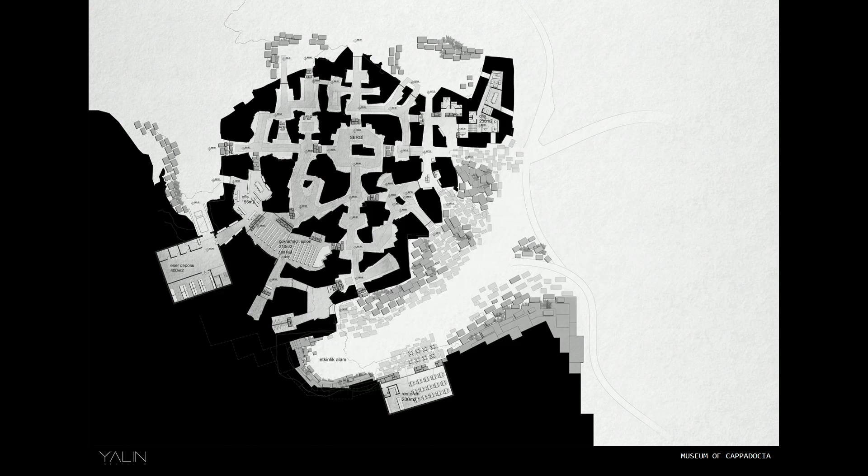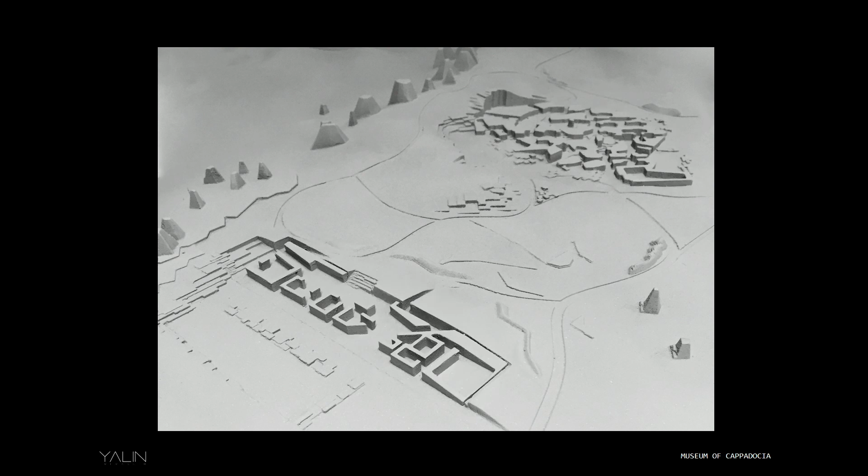Okay, the idea we are following is this: we are converting this part as a new stone mine. We are taking, covering, collecting, and then building this entrance center with those stones. This entrance allows us to protect the original rock, because normally you don't want buses or cars going near a stone like that. It functions like this: you come with a car or bus, you go inside, this is an open structure, you go up with a ramp, and then you enter the museum.

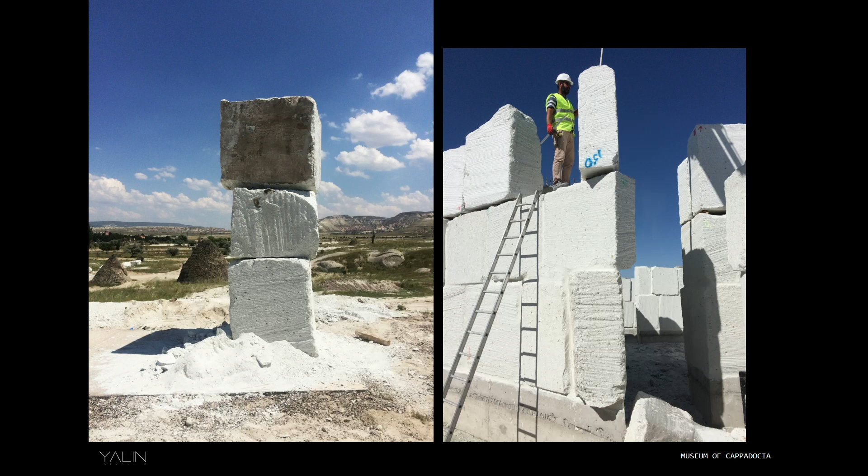You walk, and this is the museum, and all the landscape also belongs to it. Of course, it's very difficult to build in this way, because it's an ancient technique, and no one knows how to put those stones together.

Because for one stone, the idea is 3 stones and 5 meters, since we want to have some structural, huge rooms. There were many, many tries. This was one of the first tries, 3 stones put together. It took 1 day, because we didn't have this information. And this is nearly by the end.

We decided on site some textures, corner details, etc. Some of them are impossible to draw on paper. This was the important point. That's why we had so many site visits.

So this is one of the best tries. You see here the structure and the scale. We have a concrete base protecting from the rain and snow, because it's a very snowy region. And this is the texture. I like it. This is concrete.

Normally, we expose the concrete facade, and we try to have a kind of similarity. They wanted to clean all the facades, the stone facade. We said stop it, because in the project it was something like that. We keep it as it is.

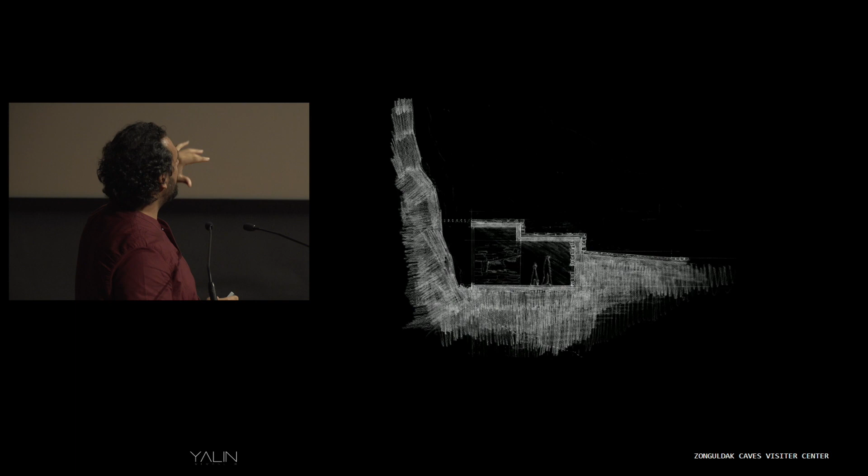The problem is making a visitor center, collecting people, and orienting them to the entrance of the cave. This was the idea: coming with bus or car, parking, and going inside. The idea is very simple - collecting the visitors and facing them with this beautiful rocky line, making a continuous circulation, a human-made cave, and orienting the visitors to the entrance of the cave, then orienting them again outside.

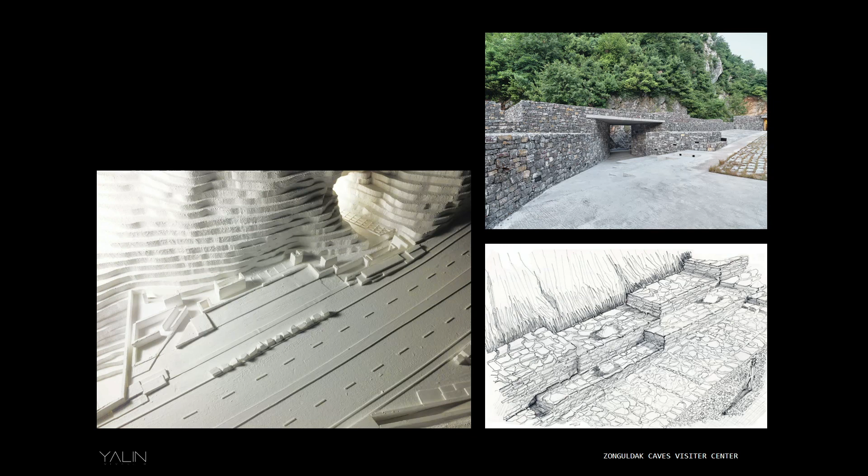This was the idea. These were some model photographs - this is the inside, and this is the landscape on this visitor center. This stonework is very interesting because we took the stone from the other side of the hill.

So you can see in the next image, maybe, a very near similarity with the texture of this existing rocky character. So this is the landscape. Here you see the entrance of the cave, and this is the entrance of the visitor center. You are parking - it's kind of a semi-hidden landscape, we can call it so.

Again, with concrete, with bus stop, the entrance and the landscape character. This was the idea from the first sketch. There are two caves - one is very short, not going so long, but the main entrance is here. We use all that stonework from the excavation also. It's just a protection shelter. You go inside and then the building orients you to the entrance of the cave.

This was the main goal for us, facing this beautiful texture of rock. It was very hard to do this because it's so narrow to a rock building. Also we use some furniture elements as the rocks.

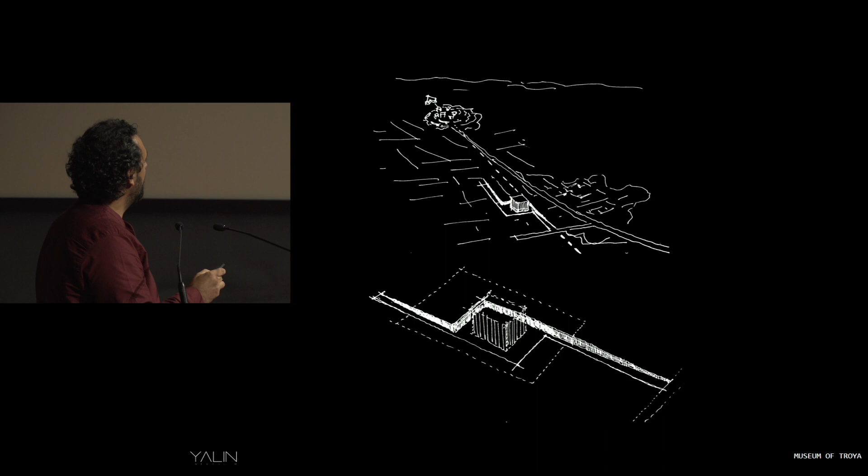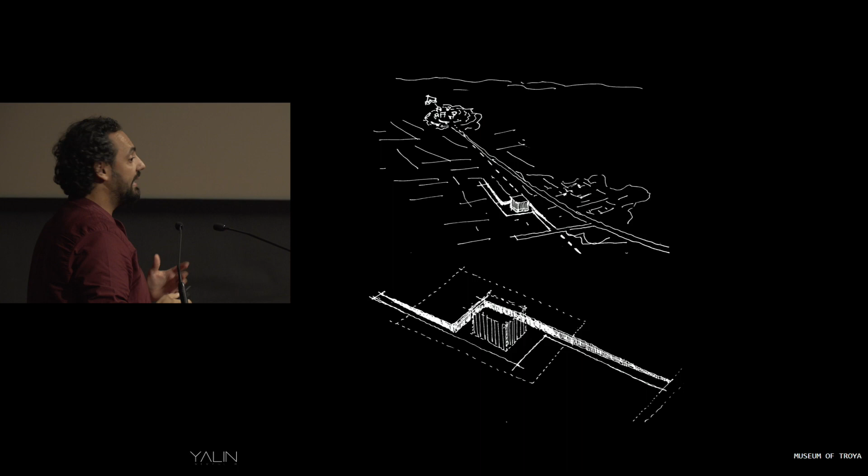This was a competition project, a national one. 140 projects participated, and our idea was very simple: going down with a ramp, reaching the street level, and going up again with a ramp. All this exhibition stuff is collected in this rusty block, like an artifact, like a terracotta artifact maybe.

This is the building. You come, park here, collecting the visitors. You go down with a ramp. This is the street level, and the landscape goes - this is our side. Also, outside in the garden, we have something.

This is the site, Troy. It's 1 kilometer away. You park here, you visit the museum, and you walk, or your bus takes you, and you go to the site. This is very important - Turkey has many different ancient cities, but Troy is one of the popular ones.

The Ephesus and the Troy have more than 1 million visitors. But it's not easy to understand the ancient city of Troy. If you go as a visitor, you should have a really good guide. That's why the museum has this mission.

You come to the museum, you visit it, and you have some questions, but not everything. You also have some very hard questions when you go outside. This is also important for the curation - it's a long-standing object in the landscape.

The entrance ramp situation - very simple materials, some concrete, some stones. Also inside we have just concrete and wood material. And it's very important, the circulation, how you move in this museum.

You go down with the ramp - it's a stretched entrance situation - and you go up always with the ramp. It's just a 6-percent slope, very easy to go. This ramp takes you to the exhibition halls, also to the roof. And you have finally an overview, very wonderful, very good, very nice, very open overview to the Homeric landscape site, Troy.

And this is the construction. I like constructions - I don't see the construction phase as an ended phase. It's a part of the design, and it should be reflected also to the building.

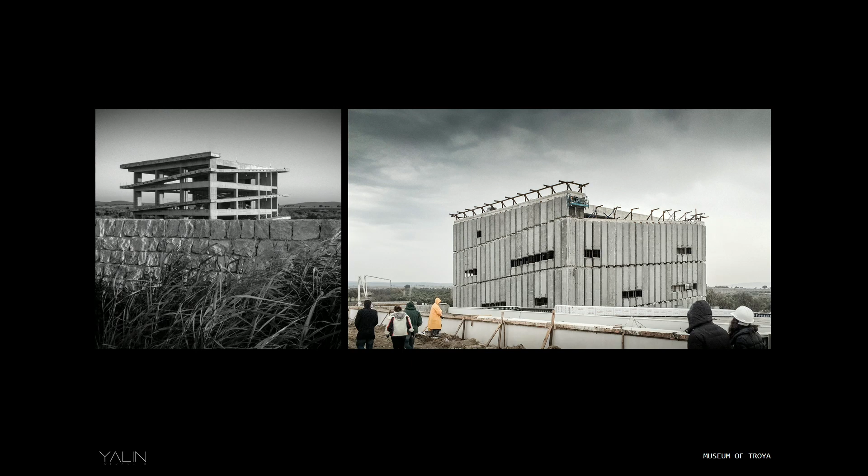These panels are isolated concrete panels, and they are spiral, following the ramp construction, and also the windows are insulated. Just the panel comes, and the glass panel comes, and it's finished. This was the idea. This is inside.

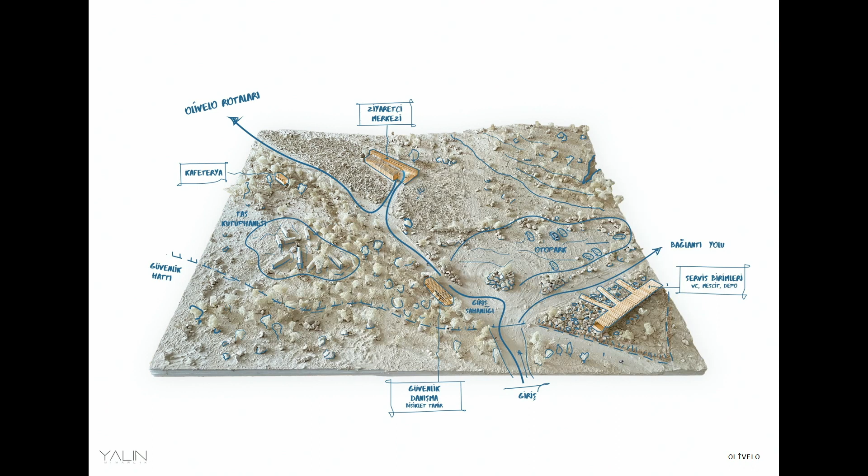This is the design, just for the entrance hall, and we use just wood elements for it. You go inside from here, you need some WCs, security, parking area, a visitor center, and cafeteria. That's all. We also have a stone library, because the region Izmir has a very rich library of stone, maybe 42 different kinds of stone, masonry types.

They have some steel pieces, they have many woods, pine, 10 to 20. We try to understand their ability - what can they do in their atelier, what can they construct. This was the idea, and then we worked in this way.

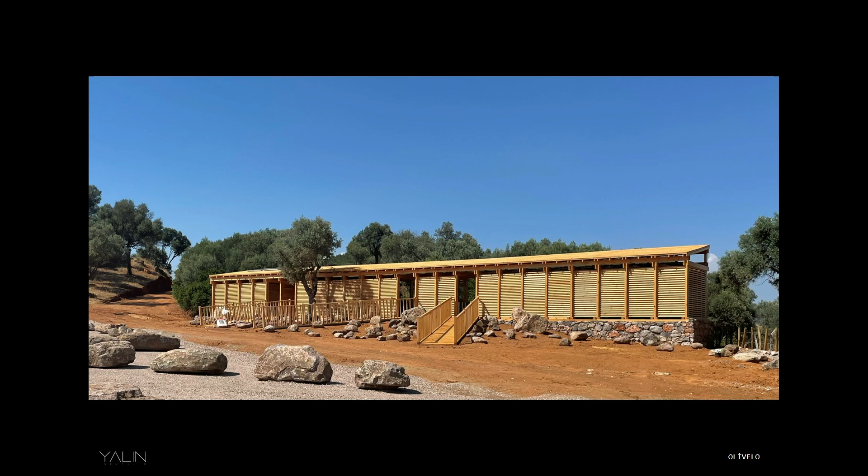This is the WC - each panel is a WC cabin. You go inside, and this is the technical part. It's a very simple structure, no isolation. This is inside the WC - it's oriented to the green. This is very important.

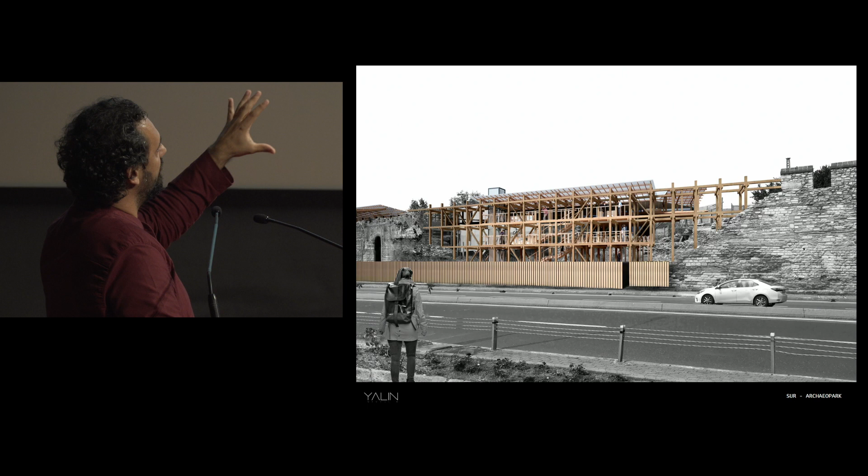Yeah, something like that. From this beautiful wooden field structure to an infill project - this is the historical wall of Istanbul.

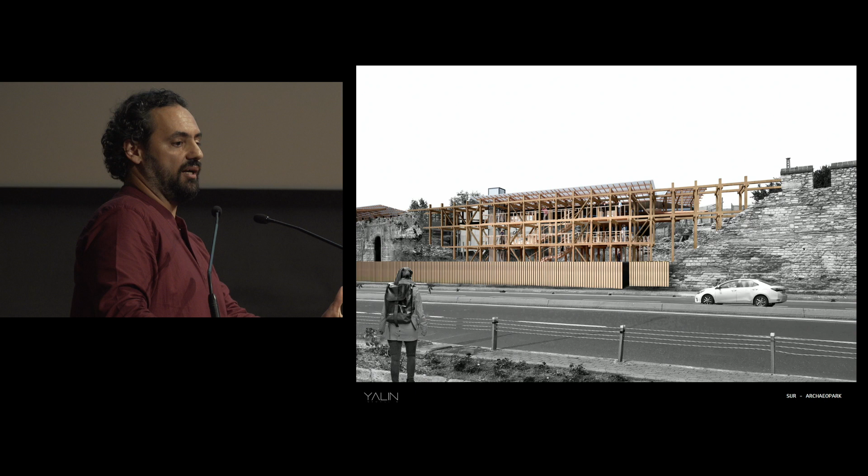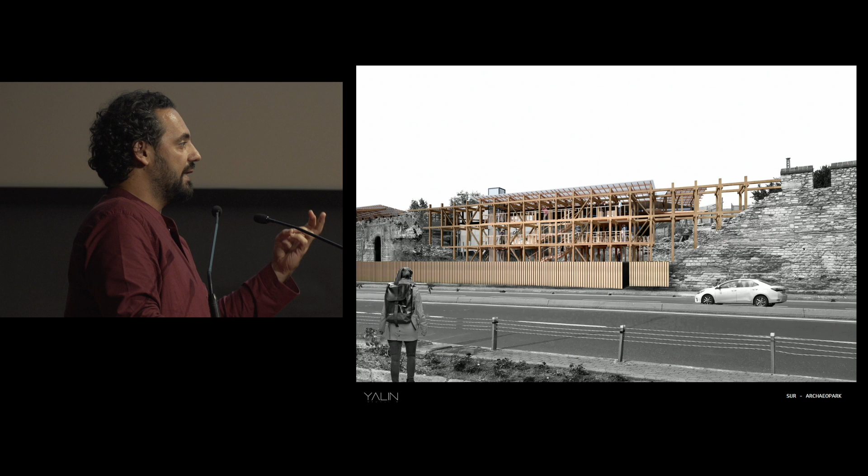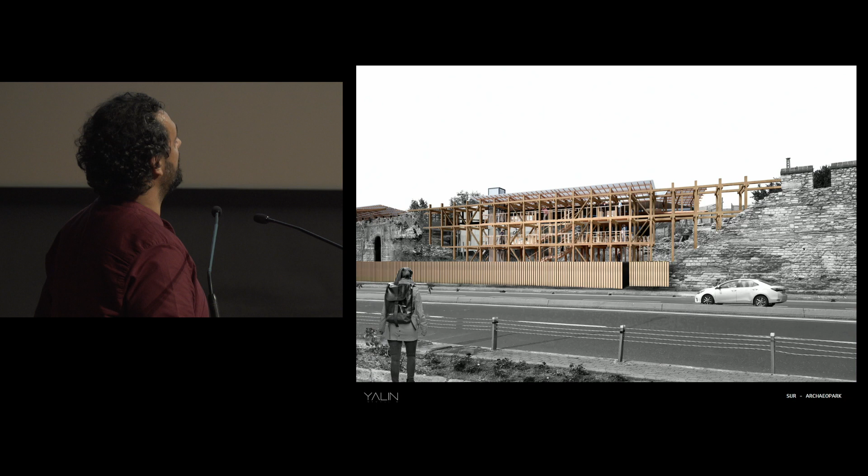And the idea is the following, a very creative one: the excavations and the restorations going on at the same time - is it possible to do this? Ongoing excavation and restoration is very exciting. You can go inside as a visitor, you can have a journey inside an excavation. This was the idea, and I think we had the opportunity to build this.

This is just a part of the project. It's 2.5 kilometers long. This is the site.

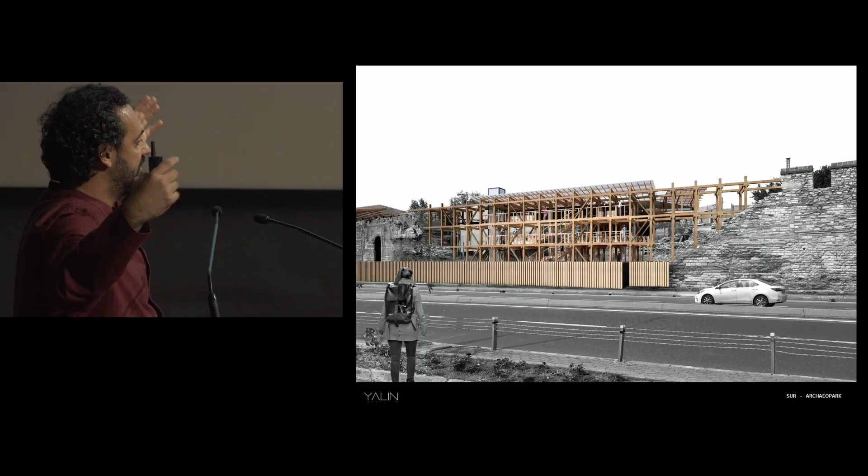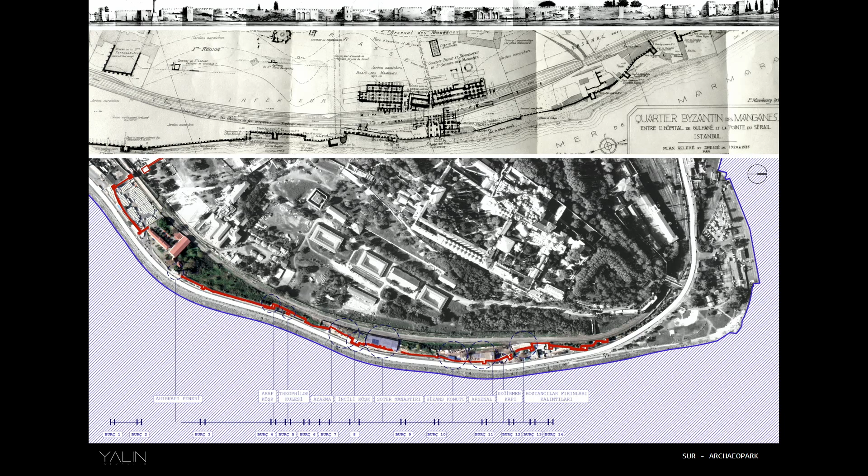The distance is very small. You don't have this maneuver, so you have to use these gaps to place your facilities. This was the existing situation. The constructor, the restoration group, used this kind of structure.

I think it's fascinating what they are doing. It's not designed. Normally architects come and design some real huge glass structure, but I like this so much. This structure is living, it's not fixed. You come one week and the other week it's not there because they move it. It's flexible, it's a living structure.

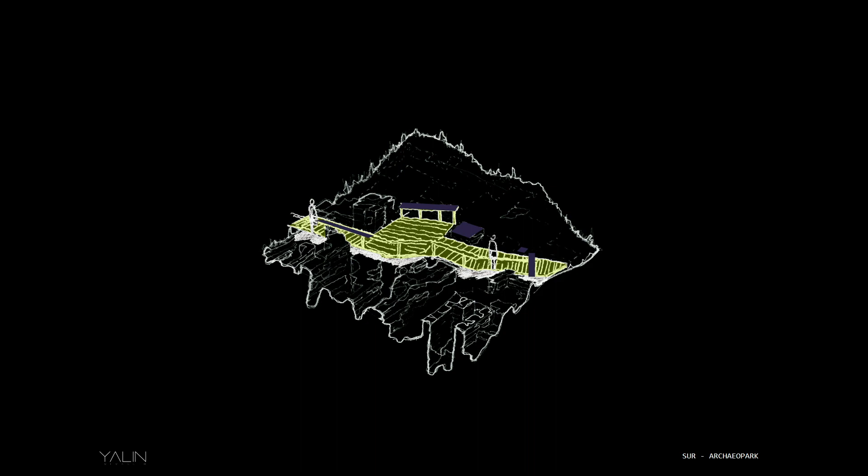They use the same material. They cut it, they hang it, they can do everything with it. And it's a really good design beginning point, I think. And this was the idea: reacting, passing to the excavation, using different ways, moving, removing, building a roof, something like that.

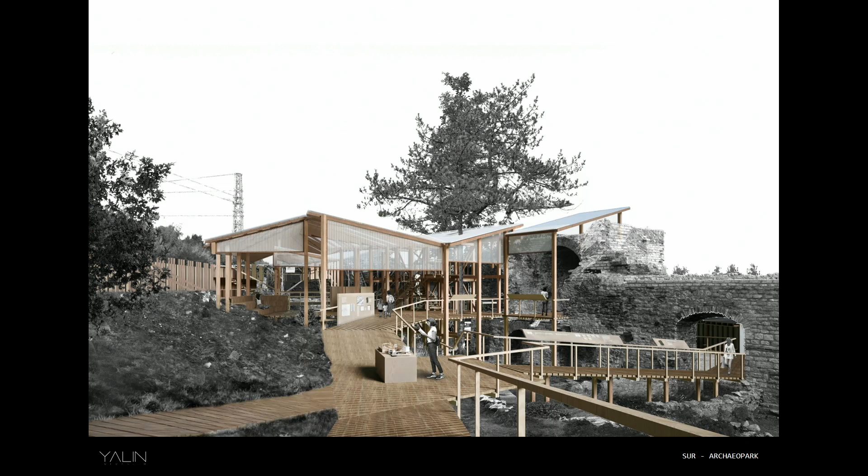So this was the idea, for example. You go inside, this is a wooden structure, reactive, sitting up, sitting down. You come from here, circulation, going a little bit down. Up, and then it's a circulation with some protection element. That was the idea, some kind.

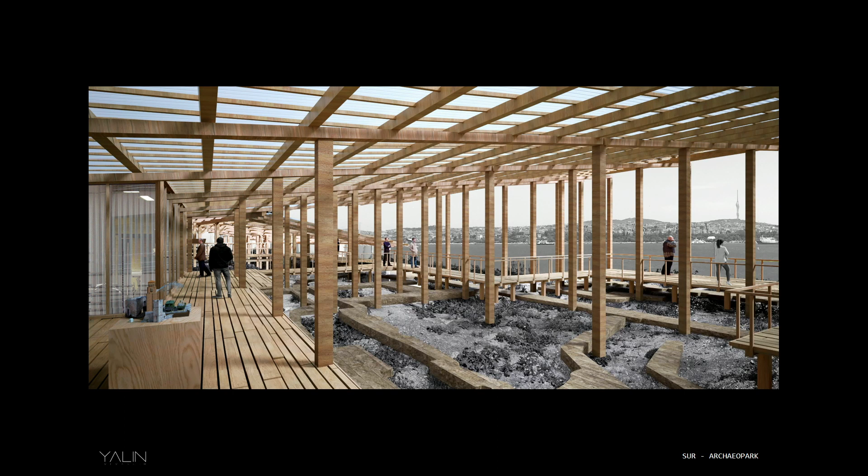Also, inside this wall there are some places for events, for exhibition, etc. This was also a point for design.

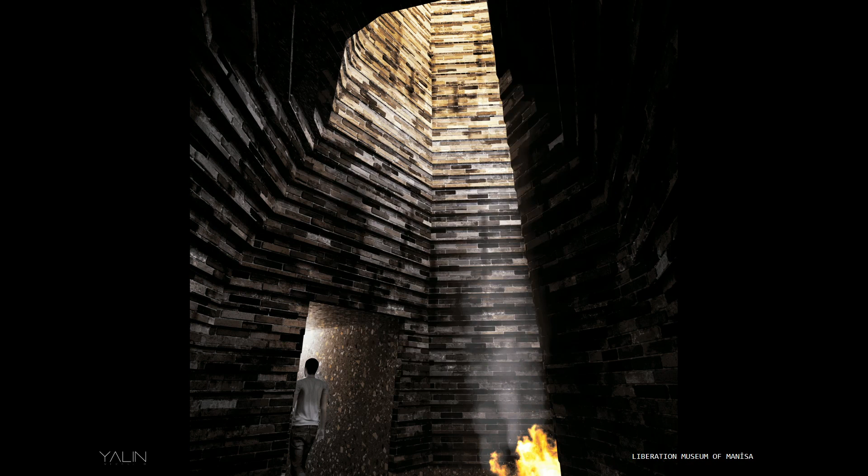Another one, before I finish - this is which we want to begin next month for construction. Manisa is nearby Izmir, it's a very chanceless city. In 1922 there was a big fire because of the war, and there was nothing left from the city. And this place is for the fire, for the memory, for the history.

And those images are from the fire. The whole city was burned. Nothing was left, just the Ottoman time buildings.

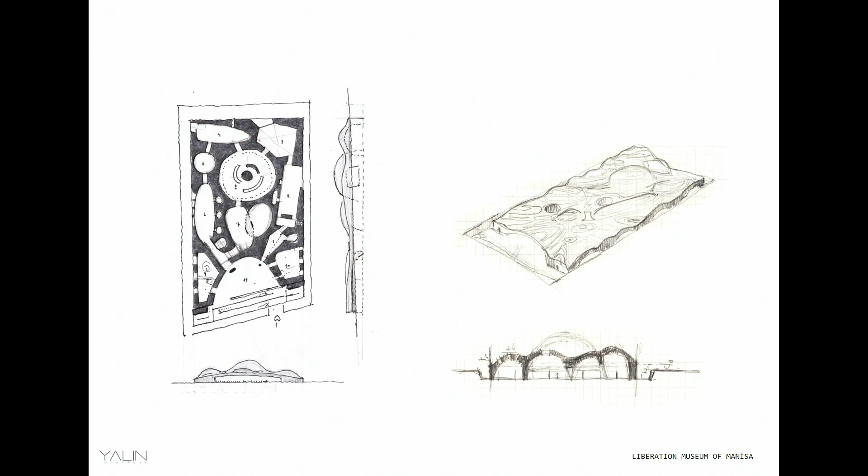And this is the idea. It's a rectangle place, geometry land, and we try to use brick elements for this project. Some rooms, some places which are connected, and each one has a theme from history, and you pass to one and go to the other one, and it's continuous circulation.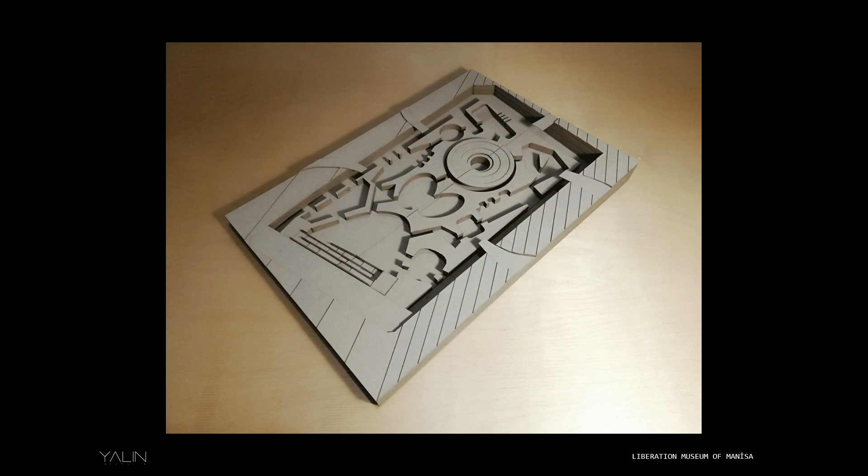Also, okay, you see the model, the places - they are just traditionally built domes, walls, arcs, etc. There are no concrete ceilings. And then at the end we have at the top a green roof, which could be public.

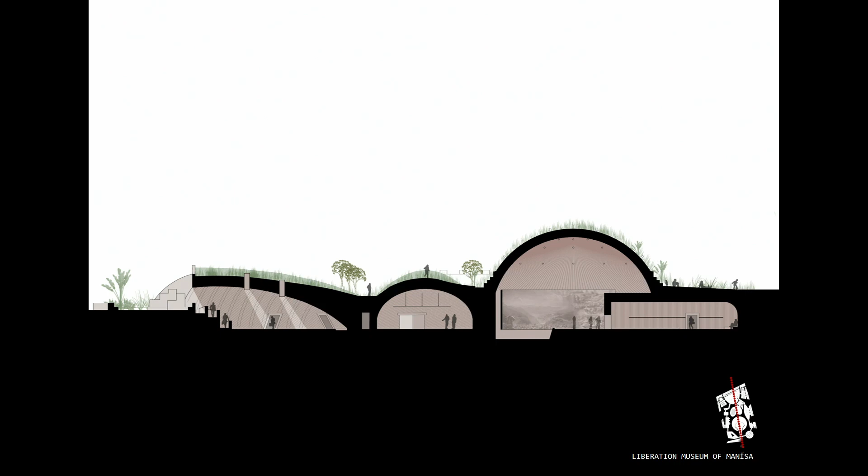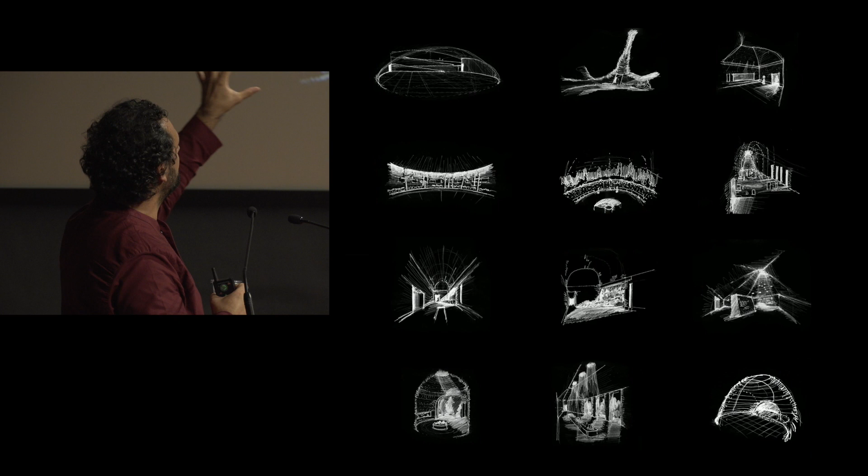This is the section from entrance and other rooms and the connections. These are some places, some rooms, some different kinds of atmospheres we are following, because we want to tell a story about Manisa, and this story has different tension. So it's not a whole one space, it's pieces of spaces with different lights, heights, and feelings.

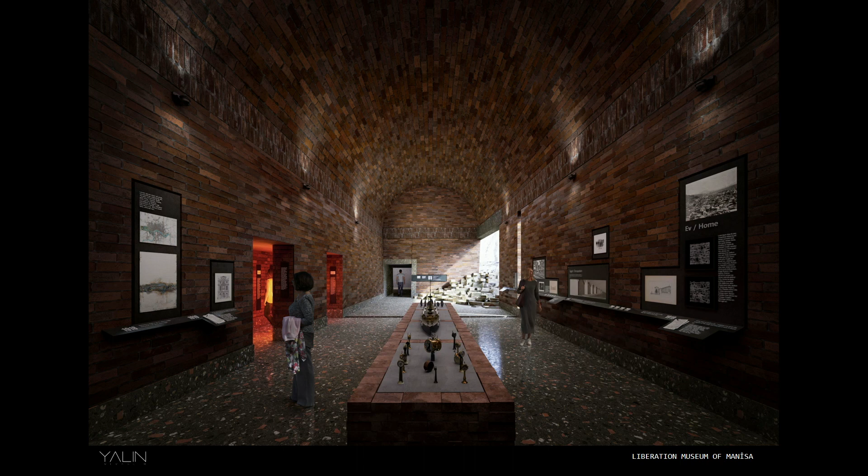This was the idea, this is the entrance. This is one of the rooms, and this is outside, what you see. And am I out of time? No? Okay, this is the plan.

Finally, I will show you our latest project in Konya. This is a library project. I like these ancient planimetric relations - they are so simple but so efficient. So the idea for the project is creating some rooms inside the garden and making a center, a head place for the books, connecting them with some bridges.

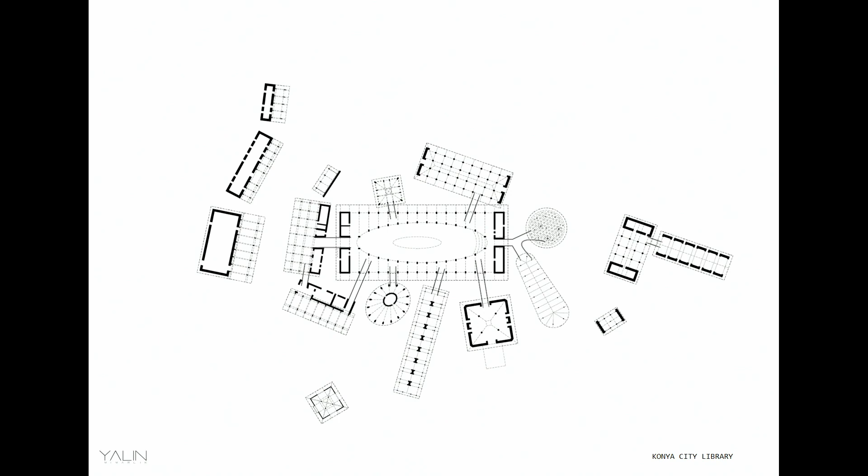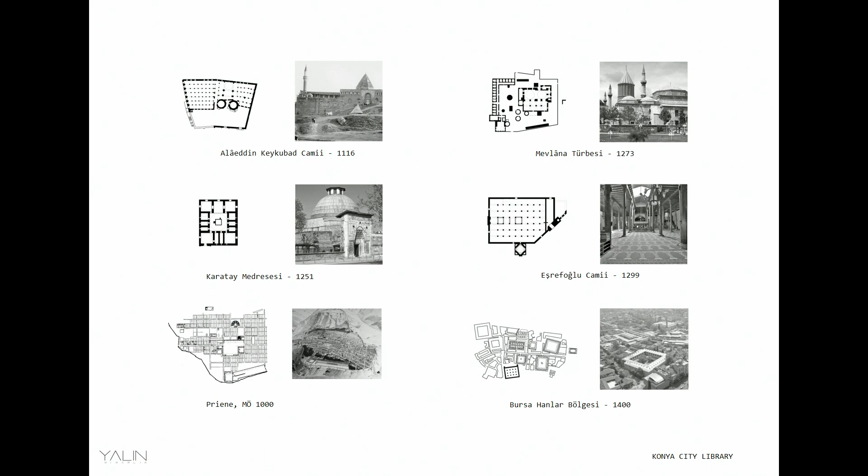And those are some examples for the structures. This is from Konya, a beautiful mosque - this mosque I showed you at the entrance. It's a wooden structure, very organic and very simple. It's useful how they do it, it's not complex. So this is the idea.

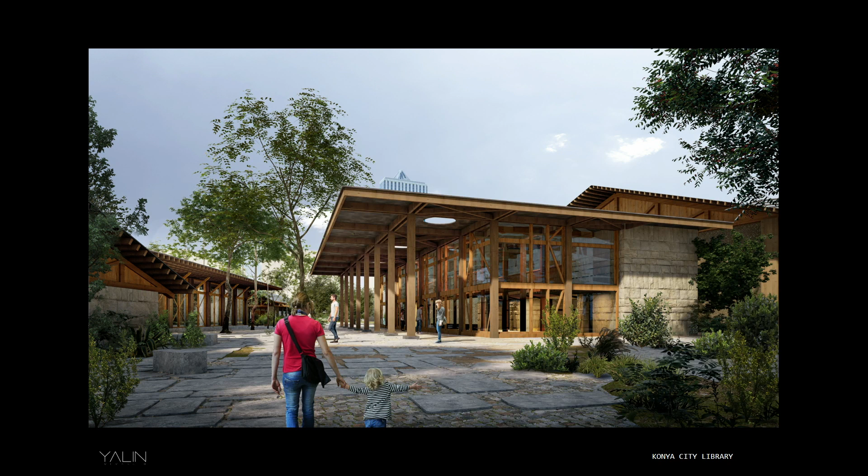This is an existing tree formation, and this is the main entrance situation. This and one-story small rooms - some of them are 100 square meters, some of them 500 square meters. It's penetrating to the green place. This is the street, then an opening street with some social facilities and the entrance of the library.

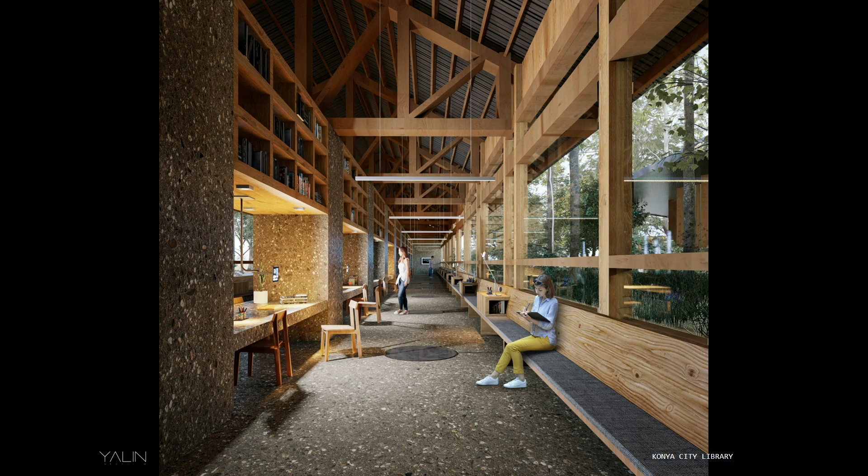This is the library hall, the big hall, with some mezzanine and a small hippodrome at the center. These are some rooms with different kinds of materials - concrete, wood, etc.

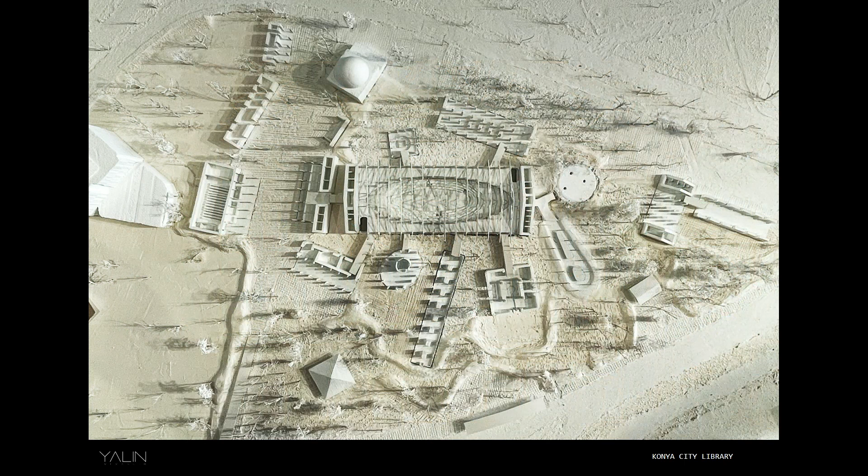Okay, so I'm finished. I will thank all my team, because big or small, it's a teamwork - you need many people for doing something like that. So thank you.